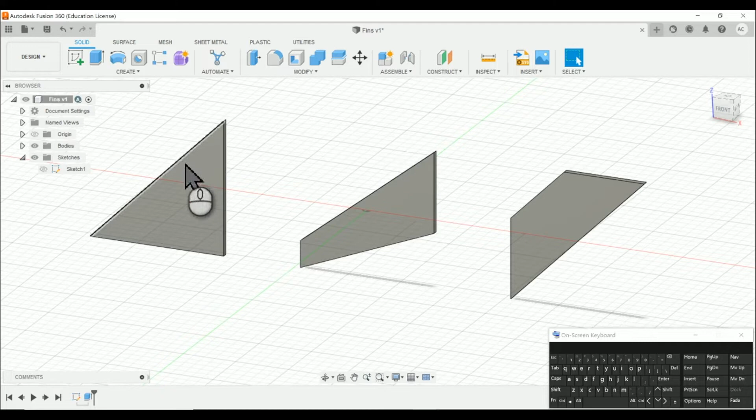So we'll go ahead and start out by creating a new file. Let's go ahead and save it, and I will name it rocket fins, and then include my name, so Aidan. Alright, we'll go ahead and save, and let's go ahead and start by making our sketch.

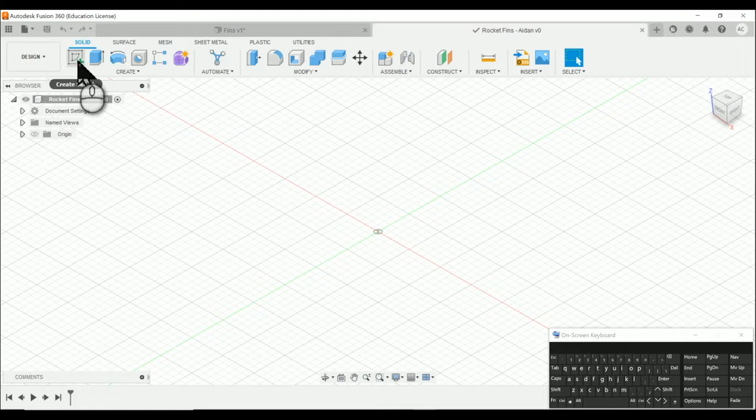Green plus button, we'll choose the blue and red axis plane, and then let's start by making a rectangle to constrain the size of our fin. So we'll go to create rectangle, center rectangle. We'll click in the center, and then drag it out 2.5 inches by 2.5 inches. I'll type 2.5 inch, tab on your keyboard, 2.5 inches, then hit enter.

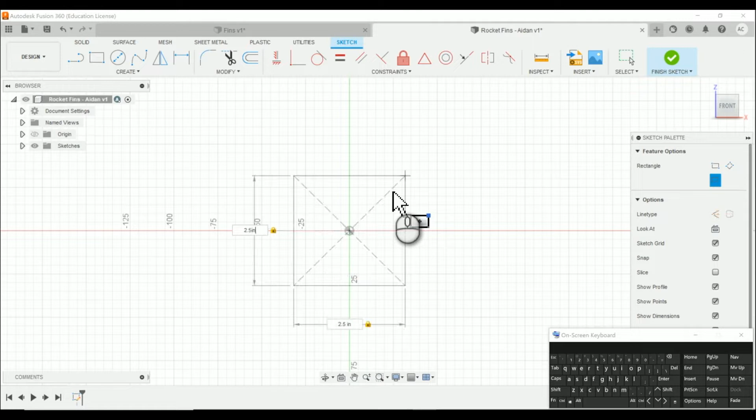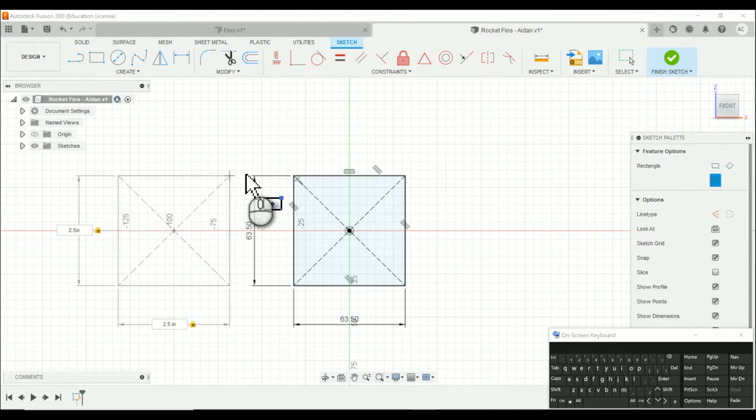Let's repeat that process. We'll go up to create, rectangle, center rectangle, and move out about 100 millimeters here. I'll put in 2.5 inches, hit tab, then again 2.5 inches, and hit enter. Alright, so now we've got two of our rectangles. Let's make one more. We'll go create, rectangle, center rectangle, move out here and click. Let's do 2.5 IN, tab on your keyboard, then 2.5 IN. Alright, so for this first fin, I'm going to go ahead and just make it a triangle.

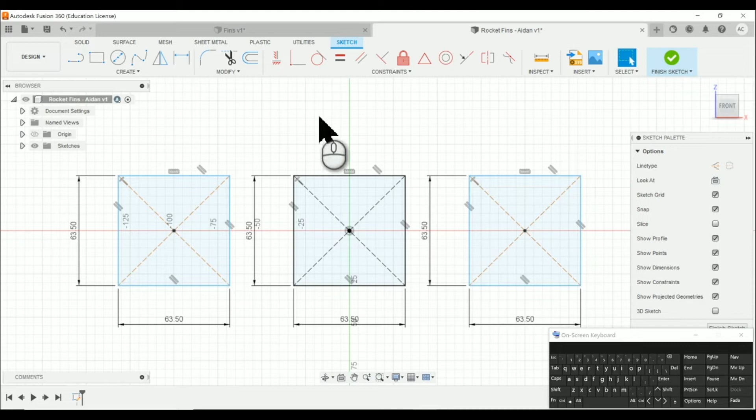So I'm going to do the line tool and click from this outer corner down to this bottom corner. And then specifically what I want to keep is this right here. So for this next one, we're going to make more of a classic looking rocket fin.

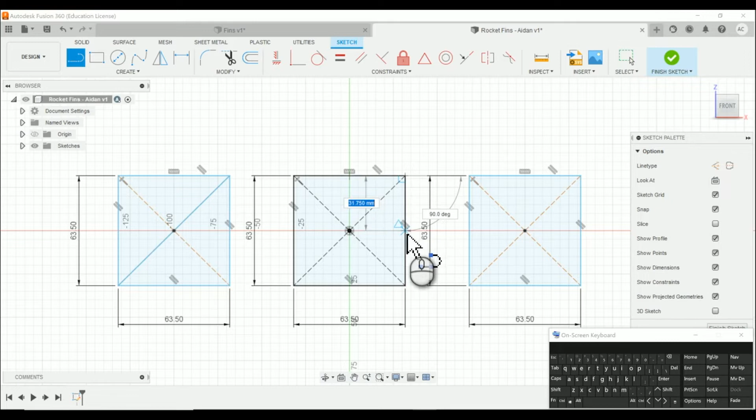I'm going to choose my line tool to set some constraints. Starting in the top corner, going down, we'll bring it down 1.5 inches, then click. Let's choose the line tool again, start in this bottom corner going up, go up 0.5 inches, then click. Alright, then I'm going to connect those two lines - one line from the top of both lines together, then one more line from the bottom of those lines together. And then what I want to turn into my final model is this.

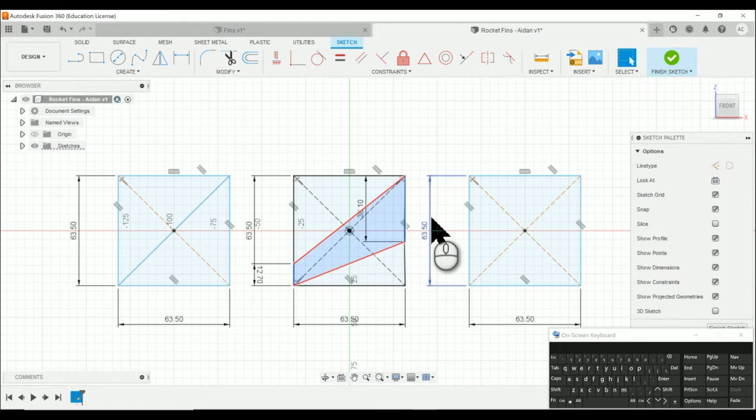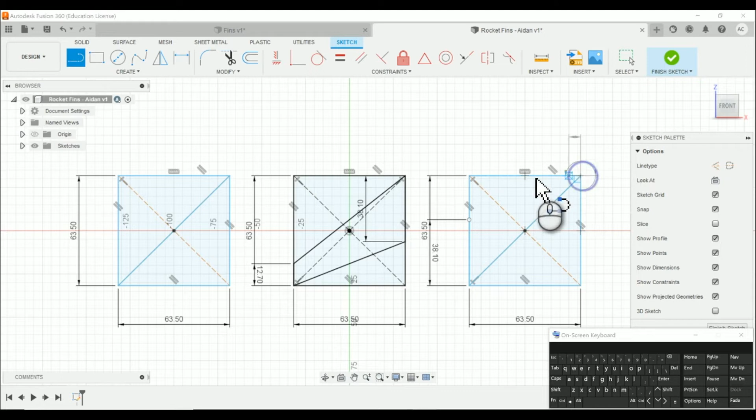Alright, and then lastly we're going to make kind of a Pizza Hut symbol. I'm going to start from this top corner down to the bottom corner. Then I want it to go from the bottom corner up 1.5 inches, and click. Again we'll choose the line tool, start in this top corner, go over to the left 1.5 inches. Now I want one last line between those two points. So click, click, and we'll select. So what we're keeping is this trapezoid shape right here.

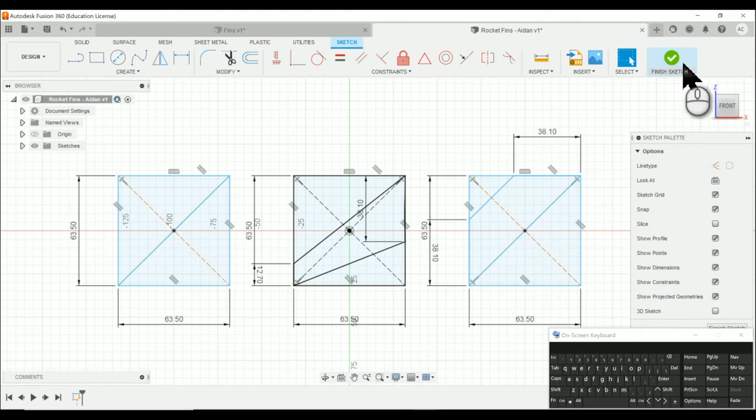So we'll go ahead and finish sketch, and then let's extrude those. We'll choose the extrude tool, then select those three surfaces I've already shown you guys. We're going to extrude them 0.125 inches because that's the thickness of our balsa wood or acrylic. Then we'll click OK.

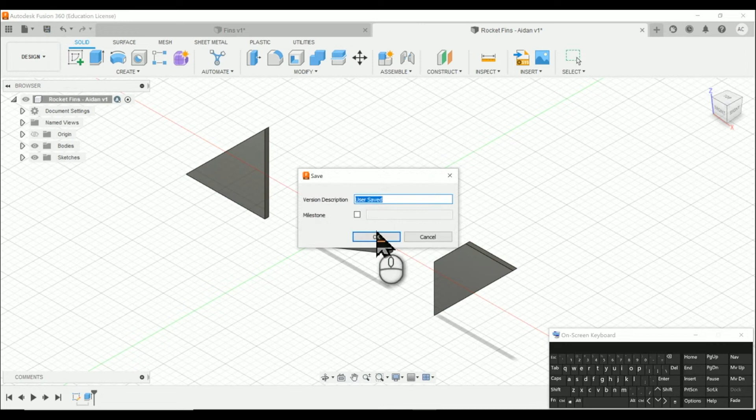And then I'm going to show you guys how to save these to cut them on the laser. So we'll save first, then go up to File, then do New Drawing with the arrow, From Design. So new drawing from design, and over here where it says sheet size, I want to set that to the second A4 size. Then we'll keep the rest of the settings and click OK.

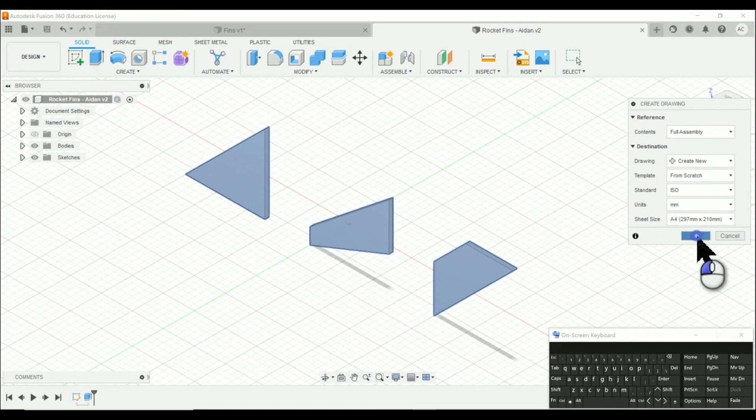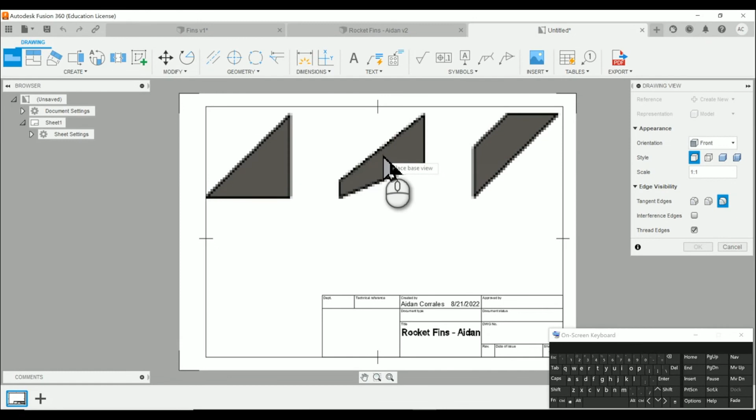Alright, and you'll see a miniature version of your fins on this engineering drawing right here, so I want to make those full size. Over here where it says scale, switch this to 1:1 instead of 1:5, so this is the actual size of our fins on a piece of paper. I'll get it adjusted and then click. The rest of these settings we can keep as is, but you may want to play with these later. We'll go ahead and click OK.

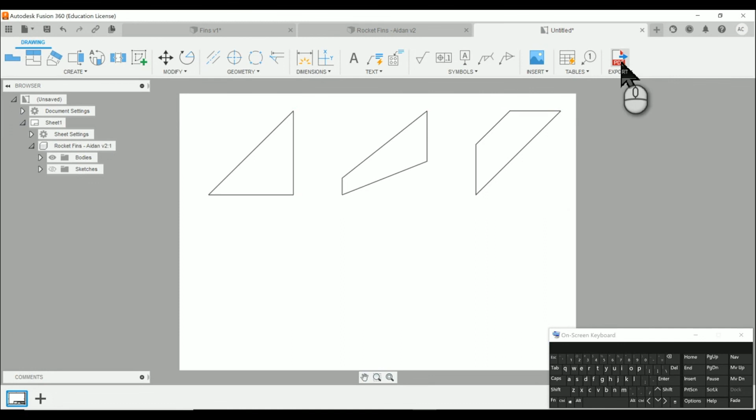Then we need to delete all of the extra information here. So I'm going to select this outer border, then right click and delete. Then I'm going to select this information, right click, delete. And then we'll export this PDF. Uncheck the line weights box, then click OK.

And then let's go ahead and name it Rocket Fins, and you want this saved as a PDF. Then we'll go ahead and hit save, and that's about it. Looks like we're good. Awesome job, guys.